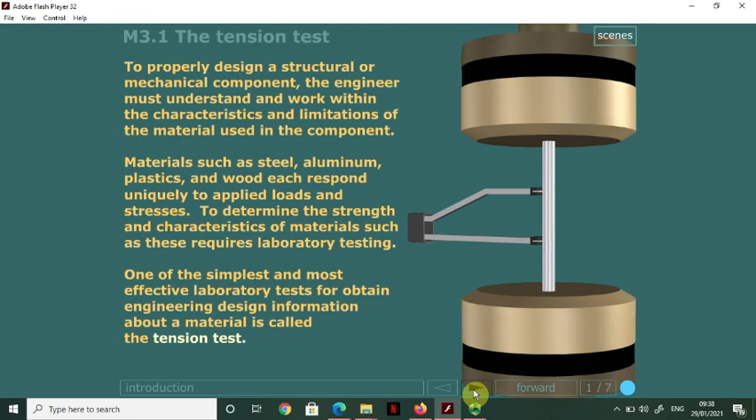Now, as we start applying the load, essentially we will be able to obtain what we call a load displacement plot, and that will allow us to study the behavior of the material.

Now, the problem with the load displacement plot is that if you change the area of the specimen, the values will change, so that load and deformation response will change. Because we want to express the whole behavior of the material independent of its geometry, we use the concept of stresses and strains. Instead of simply using the load, we use load per unit area, which is your stress, with the assumption that the intensity of the force distribution is uniform, so we can use the entire cross-sectional area of the specimen.

And we also use strain, which is change in length given by this extensometer divided by this original length, over here. So we use that to find out the strain.

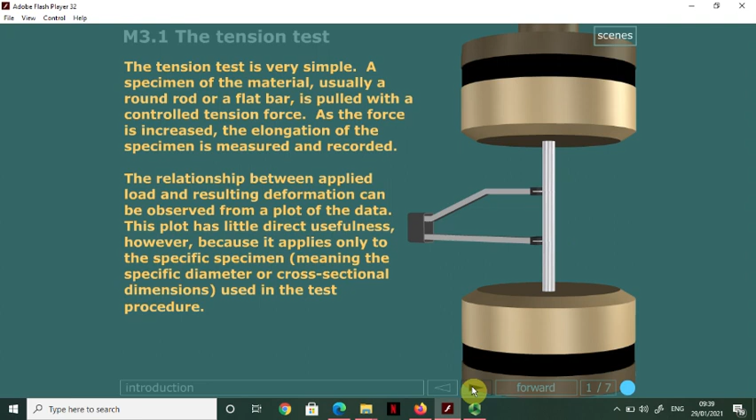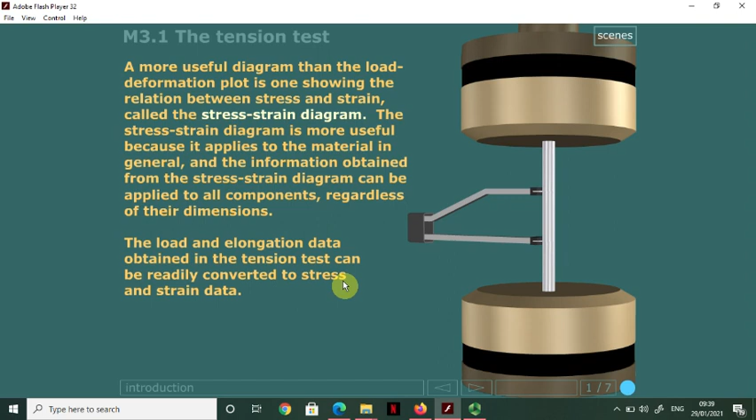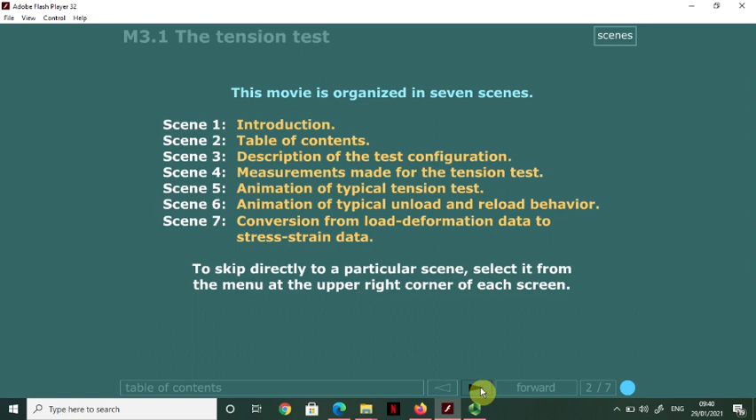So let's now see this virtual test in progress. As explained, more useful than the load deformation plot is the stress strain plot. In this video we will be looking into this virtual test. First you'll be shown the load displacement curve, and then we will show you the stress strain plot. This is going to be typical behavior of materials such as aluminum or heat-treated steels.

As explained, generally the lower grip remains stationary while the upper grip moves upward, creating tension in the specimen. So the specimen is being pulled, and you measure the load from here, from the top.

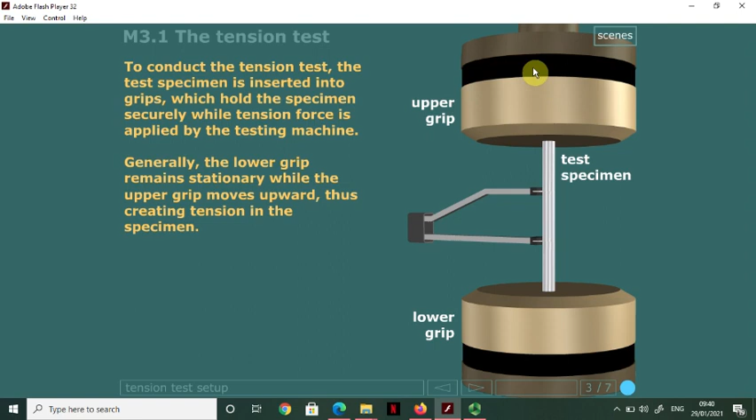Now, different types of grips are used. You can have flat grips, round grips, or wedge grips. That depends on the type of specimen.

Most metallic specimens, and the shape of the specimen is actually dictated by the testing standard being used - I've already covered in my earlier video how you can obtain some of those testing standards from the library, so have a look at that - and essentially all you need to do is pull this, making sure you have a uniform stress distribution within your specimen.

So if the specimen shape is flat, you'll generally use flat grips or V-shaped wedge pairs. That's what we generally use. But for metallic specimens like the ones you'll be using for your test, you'll be using round grips with grooves,

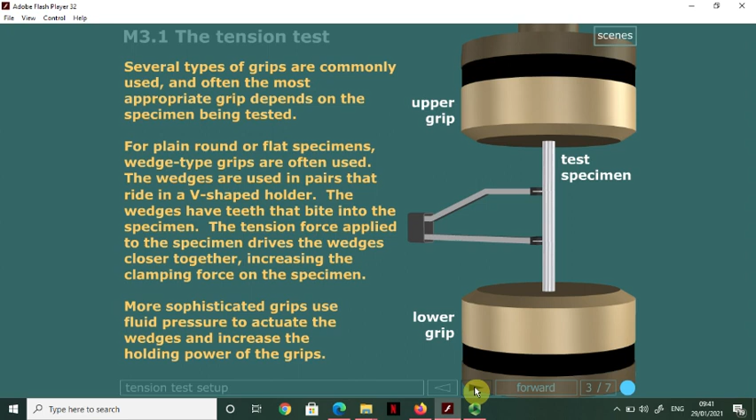as shown by your technical instructor in the photos given to you about the specimen. That's the type of specimen I'm talking about - this is a specimen with some upset threads. This will fit in on this portion and one at the bottom, and then it will be pulled.

Now, an important point is that the rod diameter at the ends is larger than the specimen diameter. So the presence of threads does not reduce the strength of the specimen, and careful consideration has to be taken while machining these, so that the stress concentration because of these threads is not so large that it actually starts breaking closer to the grips. It's a requirement of this test that the stress state, or force intensity distribution, is uniform throughout.

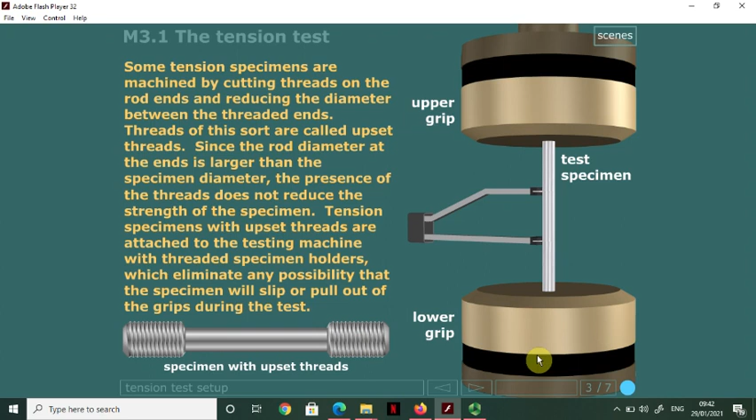Now, a bit more about the extensometer. You can see here, this is clamped onto the specimen using these knife edges, and that allows you to precisely measure the movement as the specimen stretches, which then allows you to measure the change in length.

The original length is called the gauge length. So on your data sheet, it will be written as your initial length or gauge length, and then using that change in length and dividing it with the original length, you'll be able to find out the strains.

Extensometers are generally capable of very precise measurements. Elongations as small as 0.0001 of an inch or 0.002 millimeters are possible, and they are available in a range of gauge lengths, with most common models ranging from 0.3 to 2 inches, that is from 8 mm to 50 mm. These days, we often also use video extensometers instead of these ones with the physical gauge.

The principle of working of these gauges is actually change of resistance. So essentially, when this opens up, it results in a change in the resistance because there's a wire inside. That wire gets stretched, and the change in the resistance of that wire is calibrated, and based on that change in resistance measurement, you then measure how much length has changed.

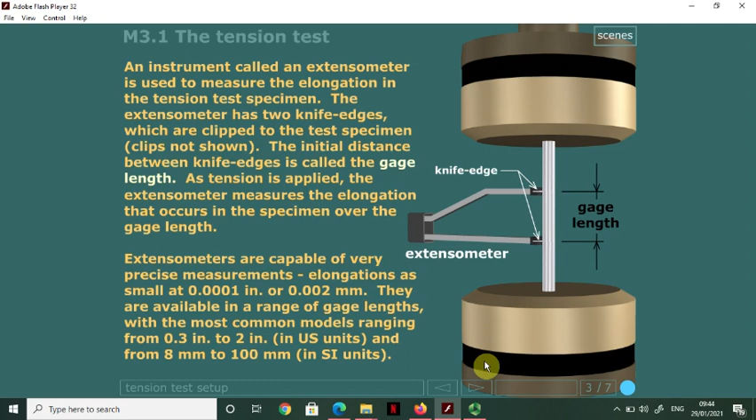Now, several measurements are made before, during, and after the test. Before the test, the cross-sectional area of the specimen must be determined. The area will be used with the force data to compute the normal stress. The gauge length of the extensometer should be noted, and the normal strain will be computed from the specimen deformation, that is the axial elongation, and the gauge length, as I just explained.

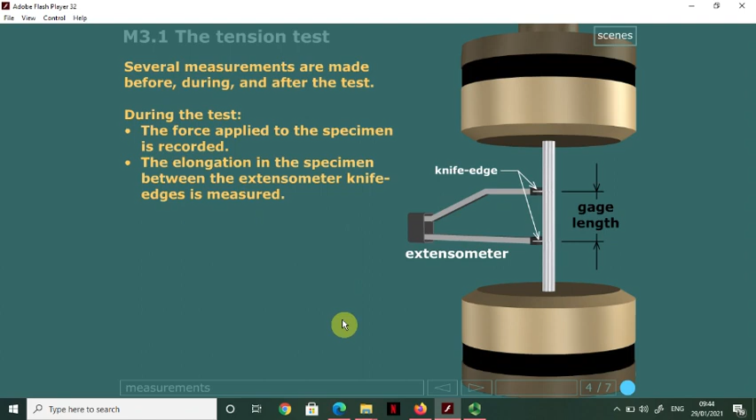During the test, the force applied to the specimen is recorded continuously, at a preset time interval depending on the machine's capability. It can be set to every second, or even less, depending on your data capture device. The elongation in the specimen between the extensometer knife-edges is also measured continually at the same time.

After the specimen has broken, the area of the cross-section at the fracture location is measured. The reduction in area, between the original cross-sectional area and the fracture area, divided by the original cross-sectional area, provides one measure of ductility. Essentially, it's telling you how much the area reduction has happened. That's one way of looking at ductility.

But overall, the term ductility describes the amount of strain the material can withstand before fracturing, and that can be seen from the stress strain curve itself. We'll look into that as well when we show the final curve.

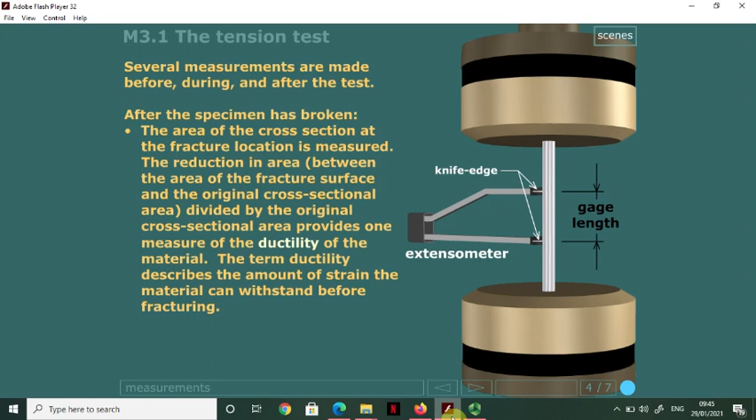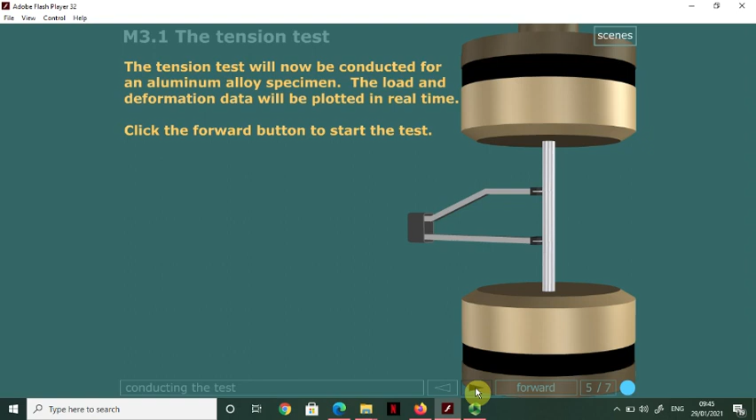So let's now look at this virtual tensile test for an aluminum alloy specimen. The load and deformation data will be plotted in real time. If you click the forward button, it will start the virtual test.

You can see the load is increasing as the specimen is being pulled up. The plot initially is very linear, but now it has started to curve. The deformation is increasing much faster now, and you can see the elongation increasing much faster.

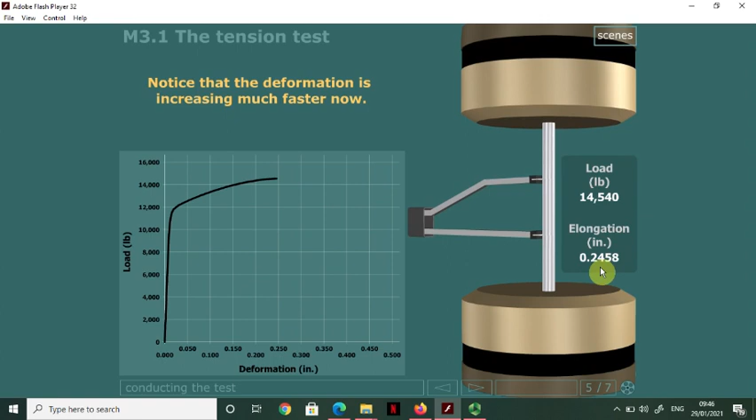The load then starts to drop, but the specimen is still elongating, and you can now see some reduction in the area as well. That resulted in necking and then final fracture. These are the typical features you see before the final specimen failure, or the bang. This is a typical load deformation plot.

More of the machines use the SI system. Here, we have shown it in the pounds-inch system. Both systems of units are still in use.

Now let's look at the tension test again, but this time we will explore another interesting characteristic of the material. We'll halfway through stop the test, unload the specimen, and observe the response.

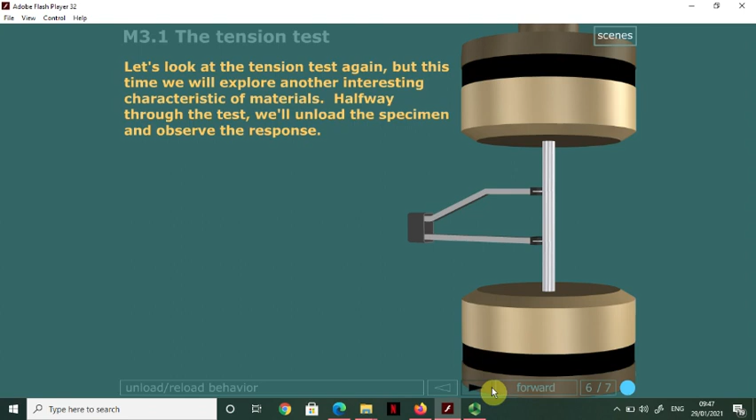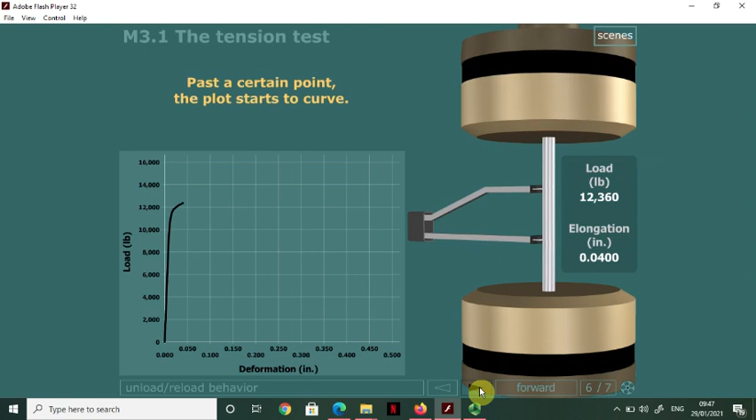It's loading again, and the plot is initially linear. Just when it reaches this point, where it becomes slightly non-linear, let's pause it and unload the specimen. The load at this point is 12,360 pounds.

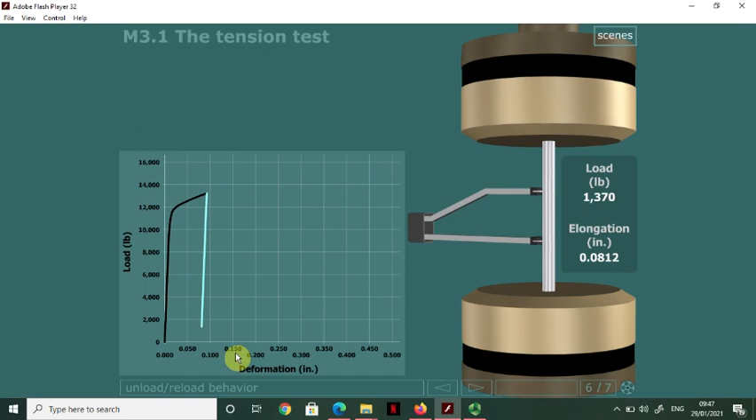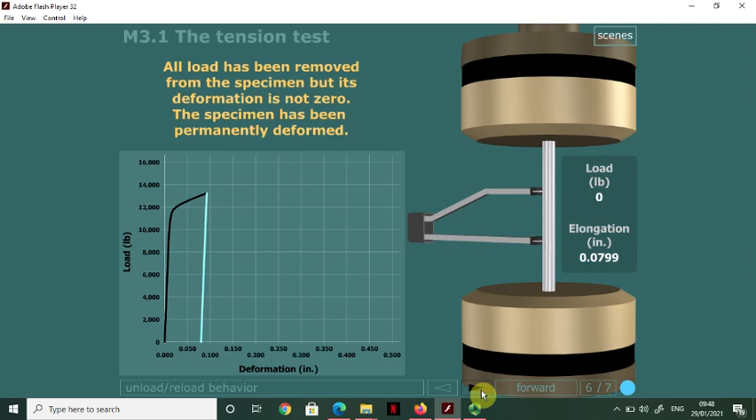If I now move forward and unload the specimen, meaning I reduce or remove the load, it will start going back, but it does not follow the original plot. Rather, it falls down at some value of strain. In this case, we are plotting the deformation, so it goes down at 0.0799 of an inch. That's a permanent deformation that is there, and this is basically now a plastic deformation that has happened.

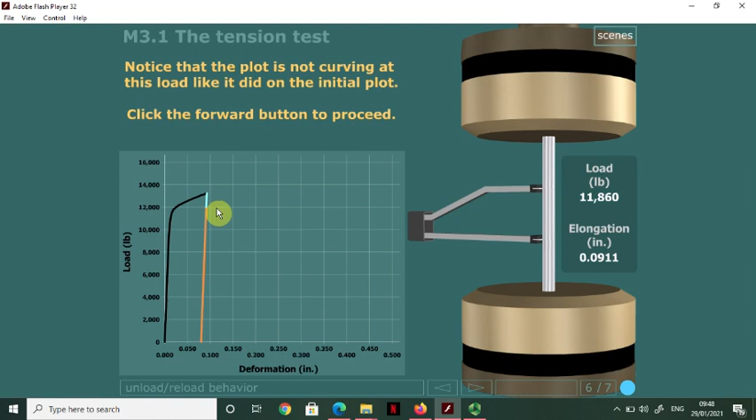If we now resume the loading, it will follow the line, keeping the same slope as that black line, moving up the same line on which it came down. This time it will not start curving at the point at which it originally did, which was around 11,860, where it first became non-linear. It will actually keep its linear behavior up to this top point. So you can see it unloads, and becomes non-linear again at around 13,230 pounds.

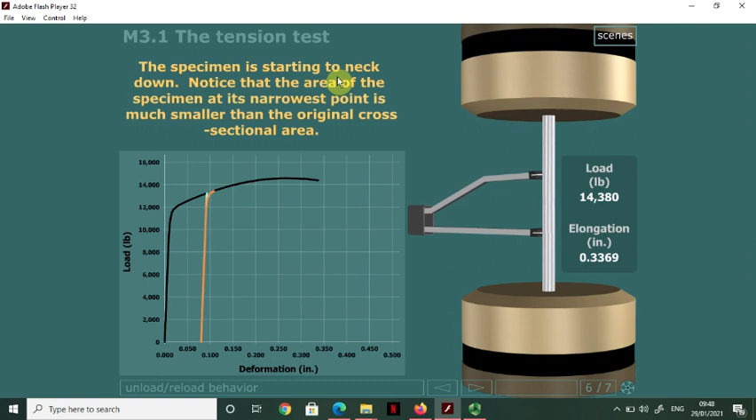The specimen starts to neck down, and the area of the specimen is at its narrowest, then it actually fractures at this particular load.

Now, this phenomenon that just happened has effectively increased the point at which the specimen goes into yield. This is called strain hardening. If you give the specimen a bit of permanent deformation, next time when you load it, the yield point has actually shifted. That's something we use in manufacturing, for work hardening the material. So we are effectively increasing the yield point of the material to achieve this.

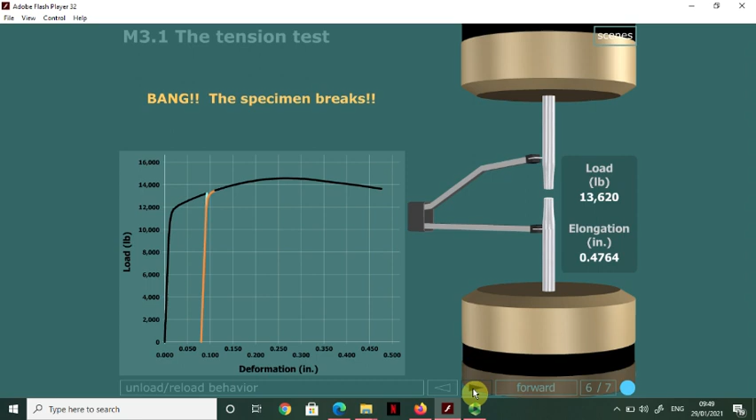Now, the unload behavior seen here is a very useful characteristic, particularly for metals. One technique for increasing the strength of material is the process of stretching and relaxing, called work hardening, and that utilizes this.

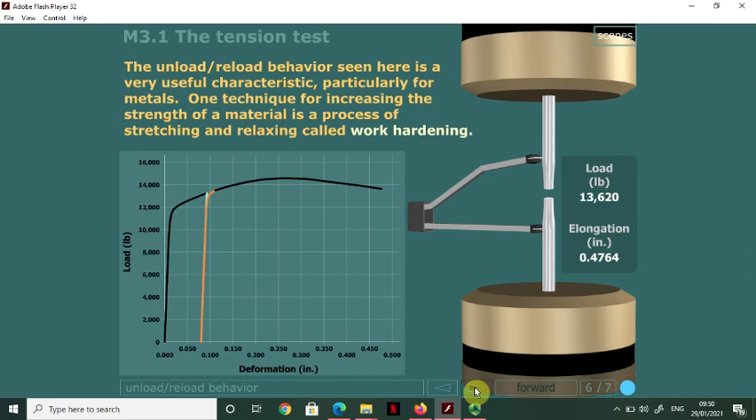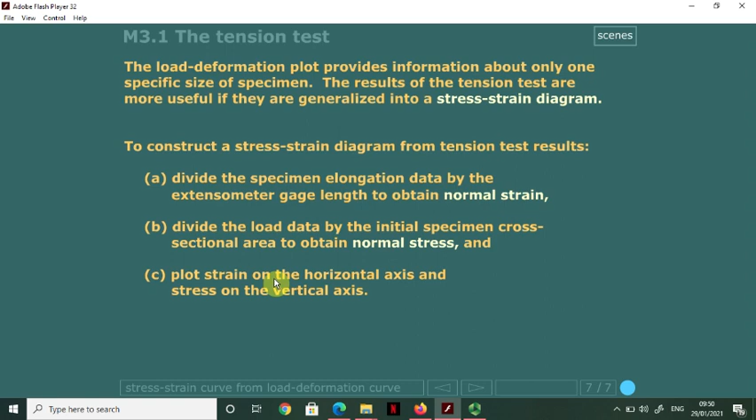Now, from this load displacement plot, we can obtain the stress strain diagram. To construct a stress strain diagram, for each data point you divide the specimen elongation data by the extensometer's gauge length to obtain the normal strain. You divide the load data, which is the force, by the initial specimen cross-sectional area to obtain the normal stress, then you plot strain on the horizontal axis and stress on the vertical axis.

I will have another video in which I will go through even more details of the stress strain plot and the different regions on that plot. So thank you very much.